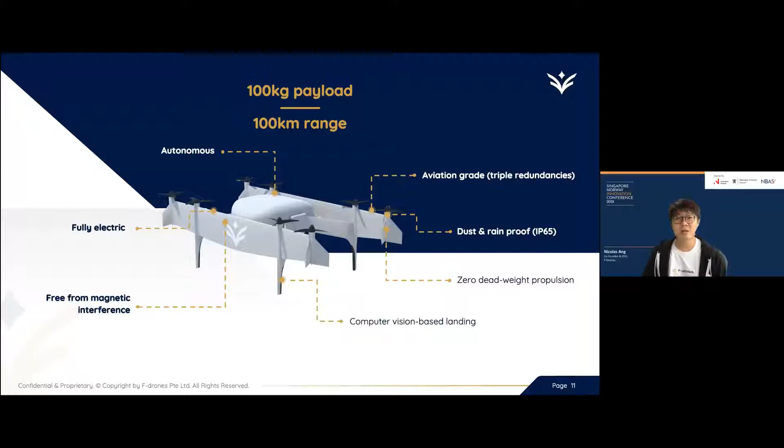So this is quite a unique aircraft. It will take off vertically like a helicopter. The whole aircraft will rotate to fly forward with its fixed wings. That's how we can fly further and faster with heavier loads. Then it will land back vertically with high accuracy using computer vision, even on rocking vessels. Most importantly, our customers can benefit from cheaper, faster, and greener logistics. So you may be wondering, what can we carry with 100 kilos?

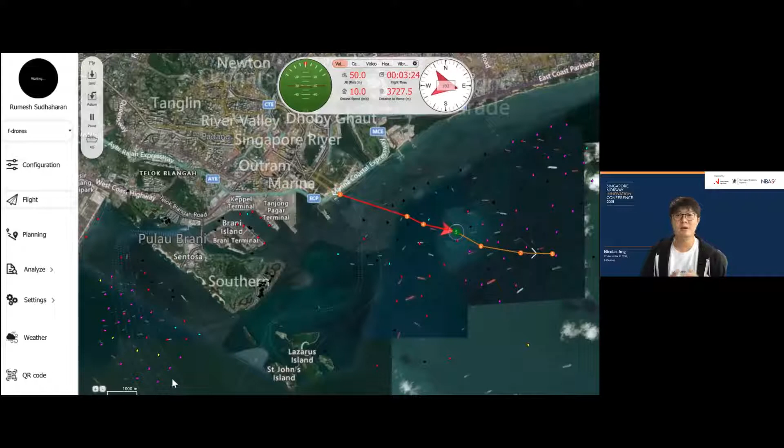In computer vision, we've also trained and demonstrated that our drones can find a helipad marker by itself and land on it, even when the marker is moved 0.5 meter per second to simulate the environment of landing on vessels. With machine learning, we're working towards a scenario where our drones can ultimately land autonomously on any vessel without the need for any markers. This is a big task, so we're open to partnerships in computer vision and machine learning as well.

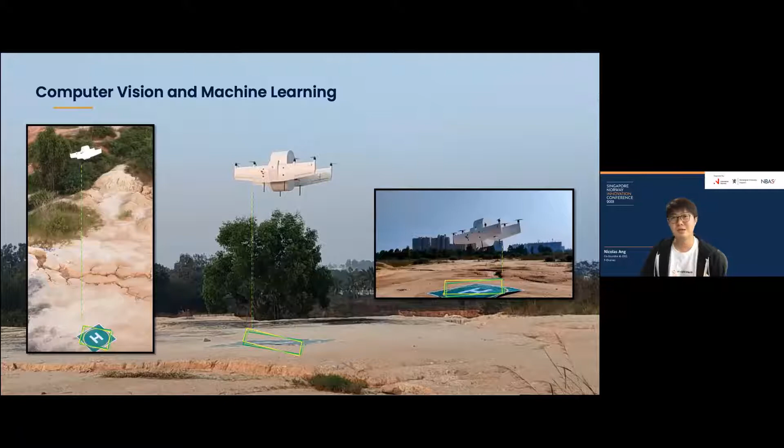Lastly, one of our key challenges that we are also addressing is long distance communications. In offshore environments, we do not have 3G, 4G, or 5G networks. So satellite communications would be the default option, but it is costly. So we are open to innovative solutions and partnerships which can address this need.

At the initial stages, our drones would only require about 3 to 4 Mbps with less than 200 milliseconds of latency for telemetry, control, and live video feed for the drone pilots. And the drone is actually designed to make decisions by itself with its own computer, so it will transition to only requiring about 50 kb per second at steady state.

So this is my last slide. In summary, we are keen to explore technology collaborations in digitalization, computer vision, machine learning, as well as offshore communications. We're also very keen to explore opportunities for more pilot projects with Norwegian companies in Singapore and Norway. Thank you.

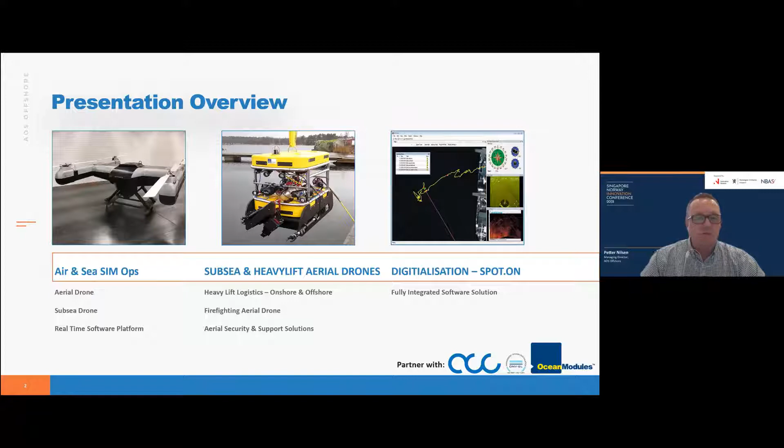So this is a typical scenario just to show you the capability of what we have. In any case of catastrophe or an inspection scenario, we can actually multitask numerous things, and tie all this together with all types of software. It is all at the end dependent on what the client is asking for and what the general focus on the problem is and what we have to look into.

The same thing will happen also for the aerial surveillance capability. And the drones that we will show you a little bit later, of course, there is basically today no limit on what type of sensors can be put into these drones.

One of the things that we have been doing is subsea drones for inspections. This is a project that we've been doing together with a client here in Singapore. We were tasked to come up with a solution for 100% diverless inspection, because they had a fatal accident some years back. From the first meeting until we delivered a full-scale pilot test, it took us 6 months. We have now done, only for this client, 1,800 piles that we have inspected according to the API standards for offshore terminals. We have met all the criteria.

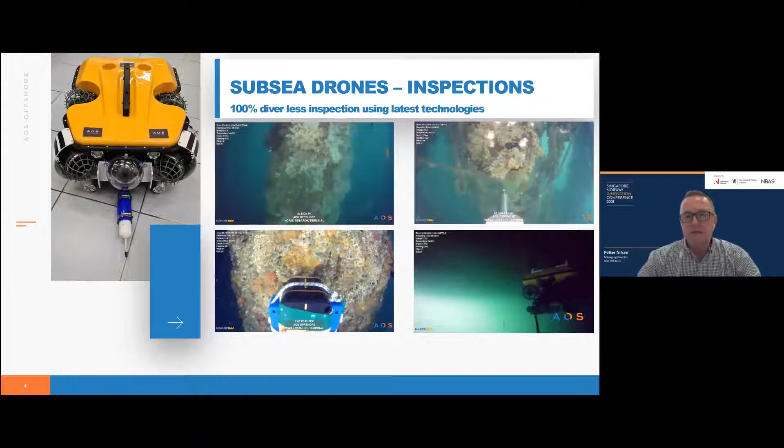Next thing I'd like to draw your attention to is the unlimited movement and the software development in this sphere. This shows some of the pool testing done when using 6 degrees of freedom systems. The software enables us to enter and maneuver these subsea drones in any possible way.

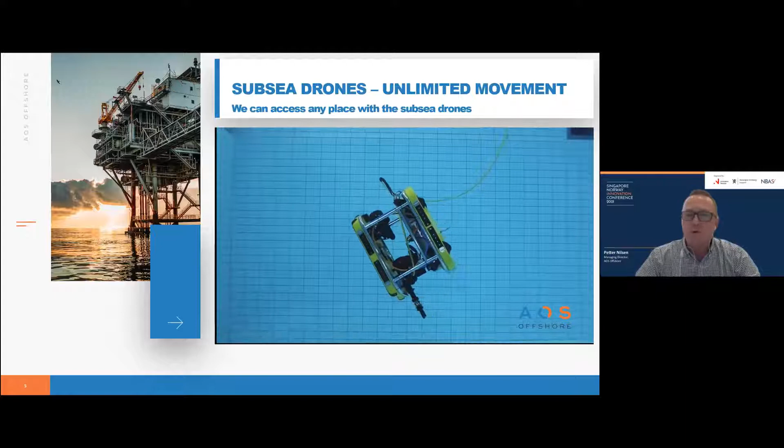There are two types of drones you can use: either surface tethered, meaning you get power from the surface, or battery operated. Still, you need a reliable system with a tether for transmission of the large amount of information required by the client. So it's high quality video, pulsed eddy current, it could be UT measurements.

We also do laser scanning to monitor problems for our clients. These are fairly advanced operations, but we're using common off-the-shelf technology combined with our various drones in order to solve problems in a timely and safe manner. I think safety is probably the key here.

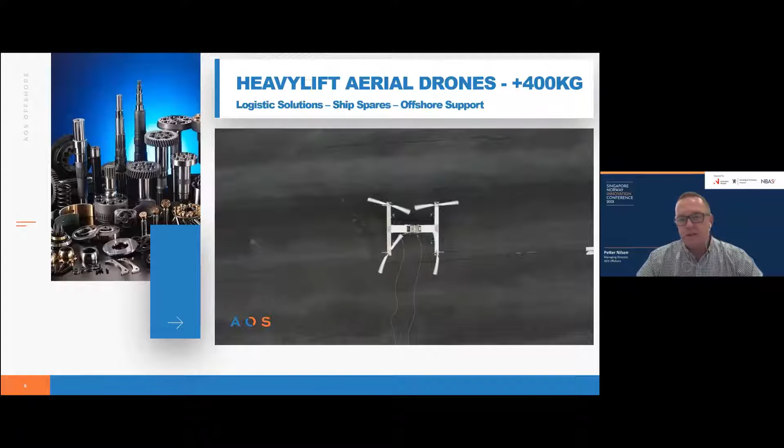Another thing we're working on is a partnership with a company called ACC Innovations out of Sweden. They've been testing the latest drones for almost a couple of years now. The biggest and heaviest lifts currently being done are up to 400 kilos. This will allow us to deliver all kinds of logistics to various locations, whether on the ship side or logistics solutions for drilling rigs.

What you see here is a trial test for one of the world's largest windmill manufacturers. We are testing and simulating a robot tool that is going to be lifted up for cleaning the windmill blades, as it's a huge part of the service done to these during operation. It's been quite an interesting challenge, with all the different types of flying involved.

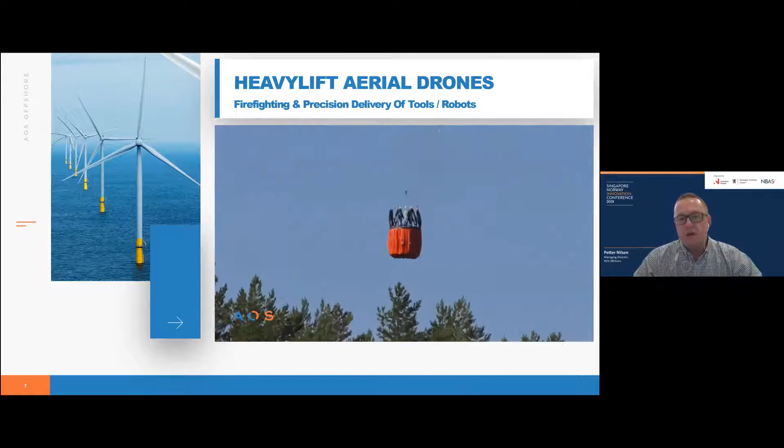The system you see here has undergone a lot of extensive testing. There are different models being done, but we're trying to use similar, known industry-grade equipment. As we speak, hundreds of flights have been completed, and it's part of the certification process for these drones.

We are doing a two-way certification: one is the international EASA certification, and the other will be for operating in wind farms. As was mentioned earlier today, you're actually creating a bit of the road as you go. Sometimes there isn't even the right regulation for us to follow, so we have to discuss with our clients possible solutions and see what we need to certify against.

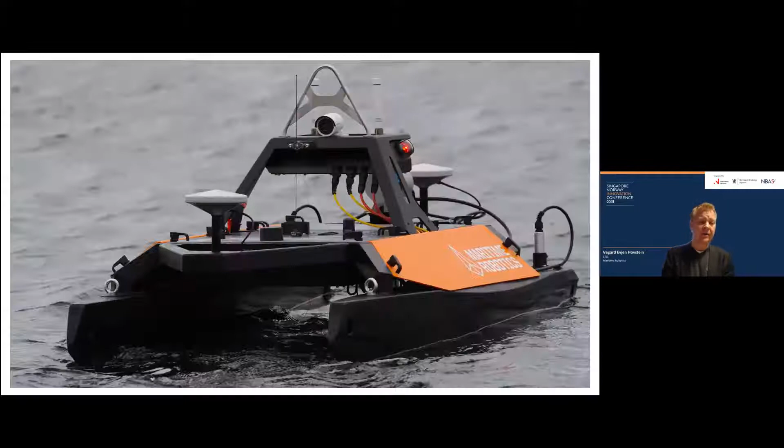This is our Otter product, our newest product in the USV segment, and it has really been a commercial hit. I think we are one of the most selling USV providers in the world, also selling to Asia - Singapore, Japan, Indonesia, relevant for your region. This is the typical environment where the Otter operates best - a sheltered water robot of about 2 meters with a lot of payload options. It's really the payload, or the data acquisition sensors, that matters here.

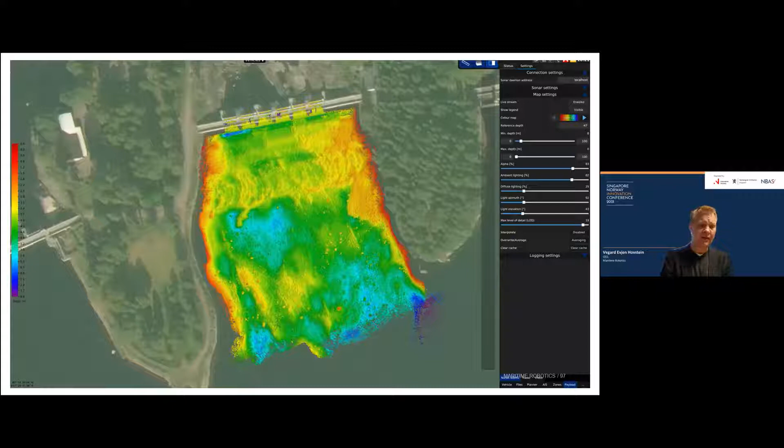The main purpose of this one is seabed mapping, or bathymetry if you wish. We can make, for example, this kind of topographic seabed map - this is a hydro dam, surveyed very fast. We now have about 50 to 60 of these distributed around the world, with very satisfied customers, mainly because we integrate the sensors so well into our software, making the user experience efficient. Among our customers we have many survey and geospatial data acquisition companies, but also Royal Navy and US Navy on our reference list. This is a very strong market for us right now.

For more harbor-oriented applications, you can also see that this type of map is something we can create with such a small unmanned surface vehicle. The underwater sonar makes the colored segments of this picture you see here, and we also attach a laser scanner, a LiDAR if you wish, on top of the boat, so we can scan and make topographic XYZ maps of what's above sea level.

So for data acquisition segments, we have delivered more than 60 USVs to customers worldwide. We have two different product platforms, one for sheltered waters and one for coastal open waters. Specifically for the smaller version, we are seeing increased attention from navies, security, and relevant operators, especially using this for harbor clearance and harbor security — they want to check, for example, the harbor or what can be on the seabed before an important ship comes to shore.

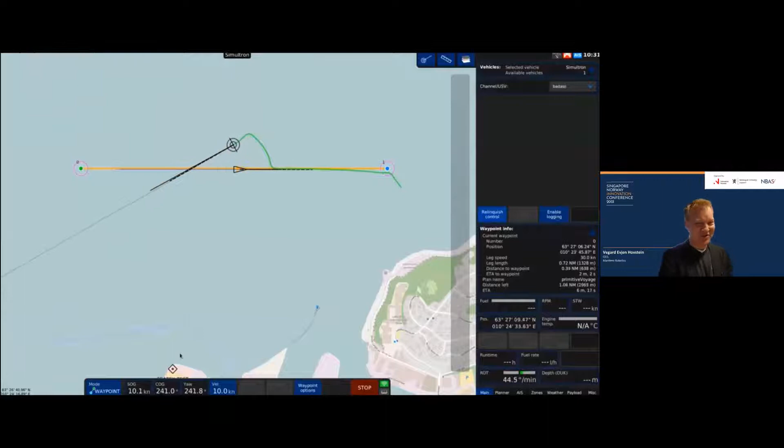As we move on from what I'd say has been, to some extent, a little bit of a hype around autonomous systems, it's important for us to focus on our core technology and actually propose that to potentially all the boat builders and shipbuilders in the world, because we believe we are among a few of the best companies within maritime autonomy systems.

So this will be a strategy change for us. We can propose our stamp, or a sticker if you wish, on any boat that says 'Autonomous by Maritime Robotics' — I compare it to computers which have Intel inside. This will be an important strategic focus for us now.

Being in Singapore, I also had the pleasure of being there before the pandemic, and one day I was looking at a little bit of the armada of fleets, and I thought: how many of these fleets are into data acquisition, and how many are into transportation? The answer, or the percentage, is pretty obvious in favor of transportation. So I think it's important for us to scale our core technology now into the transportation segment, while keeping the important data acquisition market well fed.

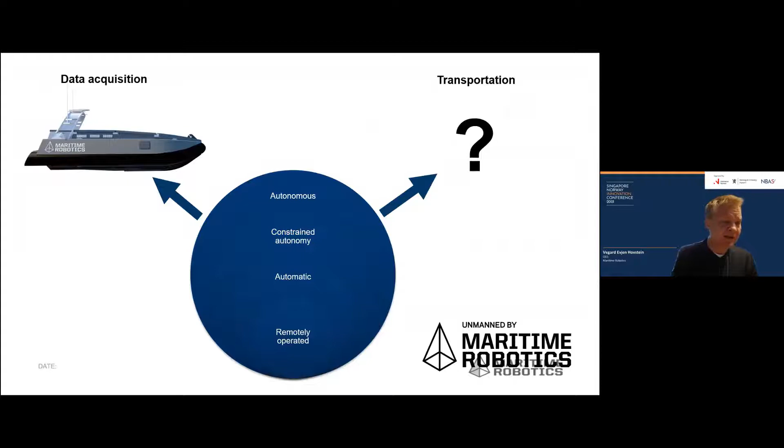We were a bit in the headlines a few years back when we launched a conceptual study with Rakuten in Japan about a small, last-mile — you could call it, or not necessarily last mile, but short-passage — sea freighter designed around two standard containers. We almost got there, but then Rakuten decided to build out a 5G network in Japan and canceled it for priority reasons. Still, the momentum was clearly interesting, and we have moved on a bit since then.

We have also seen that the current Mariner has about one cubic meter of volume and about one ton of lifting capacity. We think an initial application test would be very interesting for the market, to utilize this proven platform into applications within transportation.

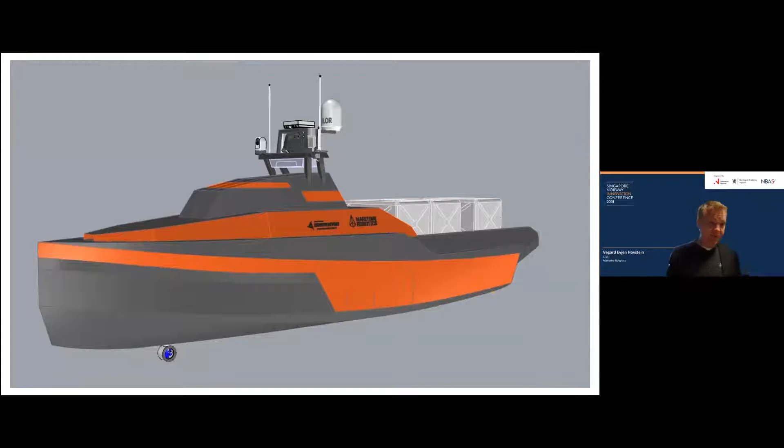We are also now, for a customer with delivery in Q1 22, designing and building a larger 9-meter USV, which will also be even more aimed at possible usage within transportation, as you can see indicated here.

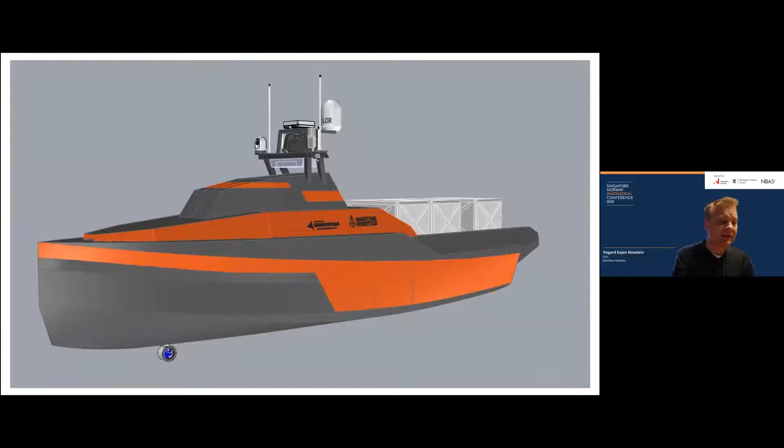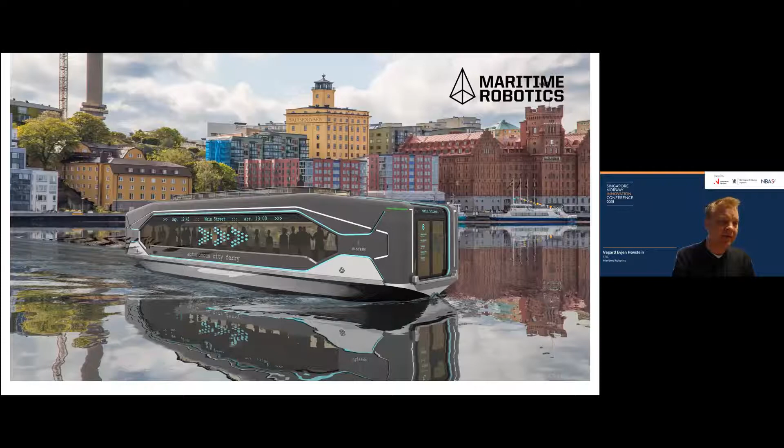To help us carry these business development activities, we are involved in a project in a city in Norway called Kristiansund, which has a strait where they have an existing small ferry today, and they will now build a new electric passenger ferry, which will have certain elements that make it more autonomous. It will be automatic, but it will also have certain autonomous functions and be autonomy ready. So in this way, we also see that we can partner up with different boat designers and boat builders to prove our core technology inside, maritime robotics inside.

Okay, I think that was my last slide. So, thank you very much for your time, and it was a pleasure.

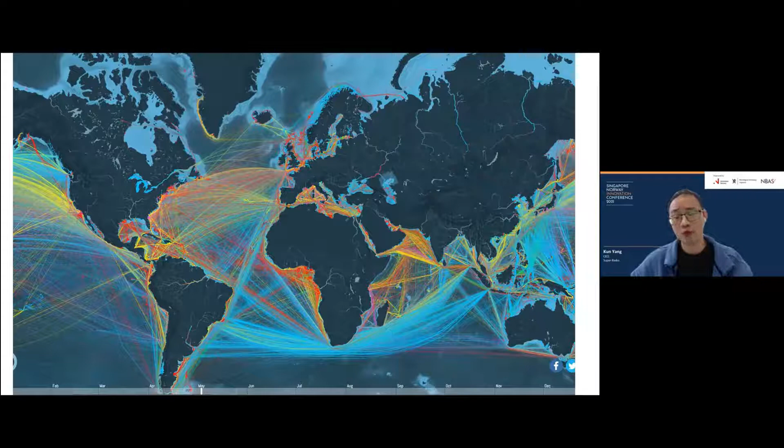I have emphasized a lot that the 5G we're talking about for land is not what we are working on for maritime 5G. So let's take a look at conventional 5G.

Conventional 5G was originally designed for land radio propagation environments, which include a lot of scatter and reflectors that create multipath for the radio wave, which is good for the current 5G solution. But the maritime radio propagation environment is obviously different from land scenarios, because basically you have line of sight and reflection off the sea surface. So if you use the conventional 5G, originally designed for land, for the ocean, you will have a lot of problems.

And that's why we emphasize that 5G is not maritime 5G. That's a big difference.

A short introduction about our maritime project. The title is LTE Wi-Fi 5G Massive MIMO Communication in the maritime radio propagation environment.

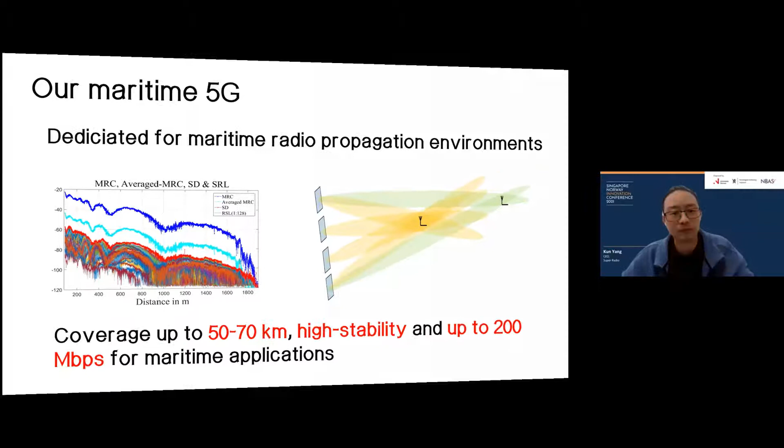Our product has two parts. The first is the dedicated massive MIMO solution used on the base station side, shown on the left-hand side, which provides higher reliability, longer coverage and throughput. That is TRL 5-6.

On the right-hand side is the terminal side product, for ships and maritime infrastructure, which is currently under industrialization procedure.

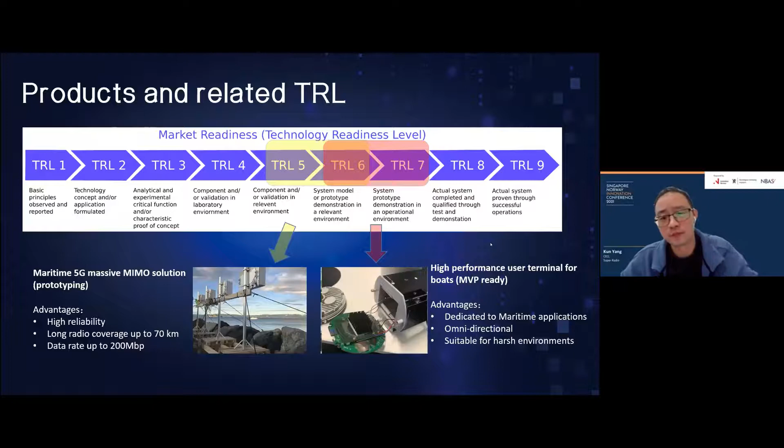We built up different scenarios to test the radio waves and system performance, using very high resolution radio measurement equipment on board, and we did a lot of field tests. That data has been used to prove our concept.

It works. It was surprising for us as well, and that's the world's first maritime massive MIMO channel measurement campaign with an autonomous ship. The second video is what we tested in the Oslo fjord with our pre-5G user terminal.

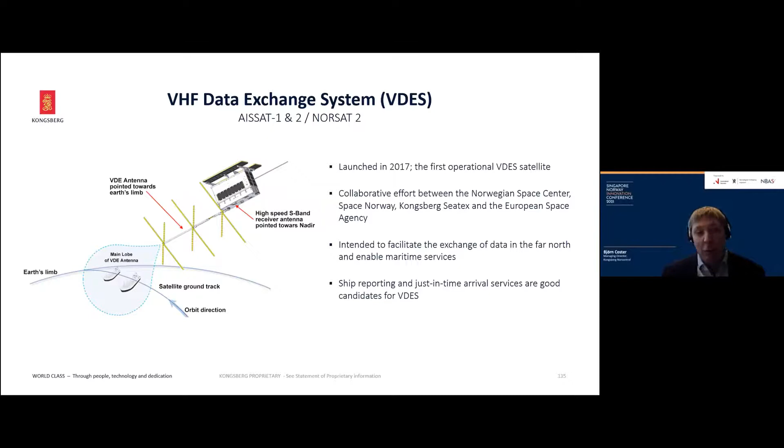Next will be an introduction of some demonstrations and tests which have been done. I won't go into detail of all of these, but there has been one with a Coast Guard vessel using VDES satellite already in 2019-2020 in collaboration with the Norwegian Coastal Administration.

We have done systems too, where we have exchanged route information between ship and shore. We have the VASP project. We have the Sesame 2 project, which will come as a video in a second. And you also have the R-mode, which is maybe new to some, but it's part of the VDES infrastructure, where ships can get their position from a shore-based VDES station instead of from their own navigation system, which could be very useful in critical situations where you for some reason don't get your position.

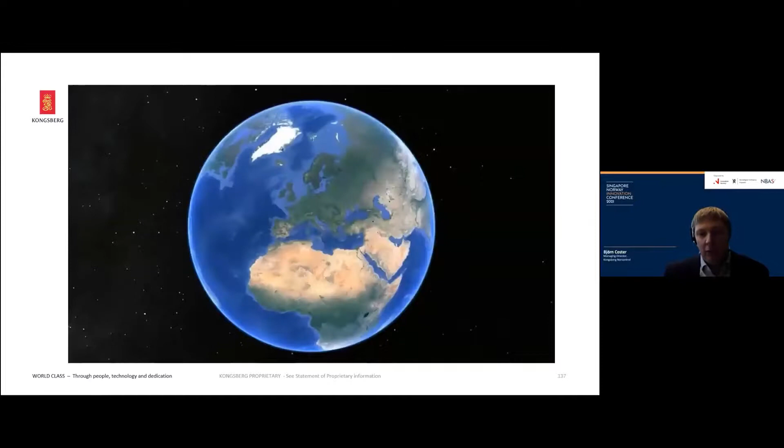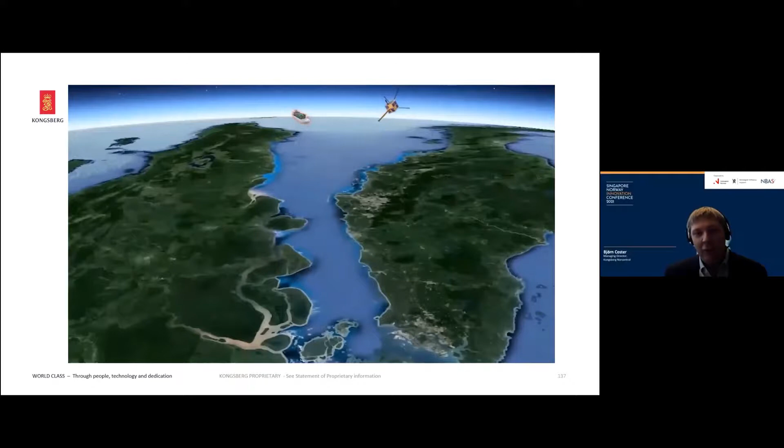This is an introduction of our Sesame Solution 2 project. I don't hear any sound - I would assume you don't hear either, but it's basically presenting e-navigation voyage into Singapore port.

The idea is that the vessel, early on in the voyage, will be able to report via satellite VDES to Singapore VTS, and in that way get a better planned voyage as well as a safer journey because the journey is being surveyed by VTS.

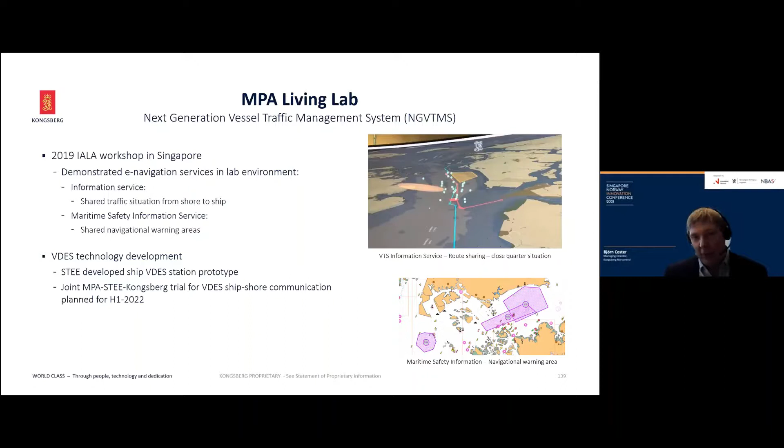The following navigation services seem to be the most suitable for VDES. It's really about voyage reporting and basic information services such as welcome messages or reporting links and what services a vessel could have. For example, if a vessel comes to Singapore, it can get a message that certain e-navigation services are available, and then you can click on them and utilize them.

Or maybe use 4G, 5G systems in the future. The main challenge with VDES is that bandwidth is limited, so it limits the service capabilities. Hopefully 4G, 5G will be a fundamental change and make new services available. So finally, it's really about standardizing these services and the protocols used, so we can use existing equipment on board the vessels.